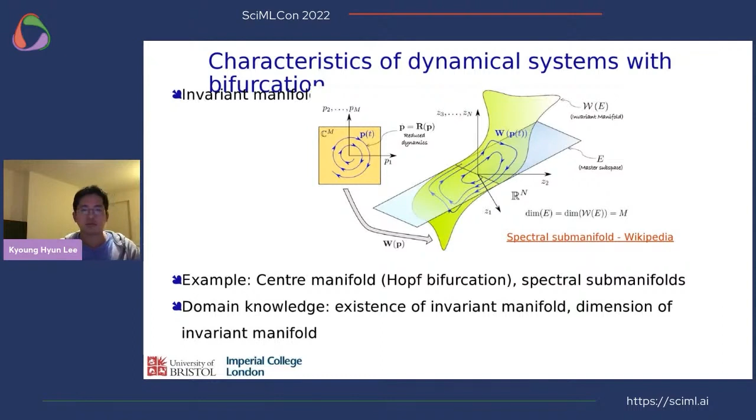This is a general framework for training parameter-dependent ODE models using machine learning. First, we model the parameter-dependent vector field using scientific models, universal approximators like neural networks, or hybrid models. We also need to model the observations, for example as a simple projection map or also with universal approximators.

After we build a model structure, we transform the parameter identification problem into an optimization problem using data fitting criteria such as mean square error. I'll explain in the next slide how we infuse the domain knowledge of the invariant manifold and the bifurcation into our machine learning problems.

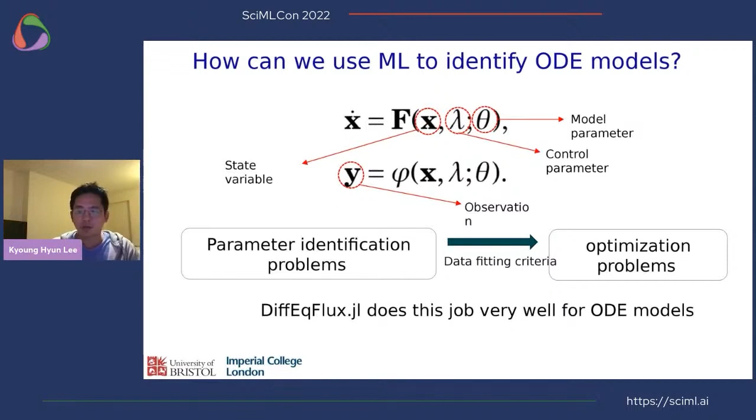Yes. So basically, I do experiments for systems with bifurcations, which is called experimental bifurcation analysis. This is the bifurcation diagram measured from a flutter rig experiment, which is a typical subcritical Hopf bifurcation measurement. These red circles are the measured unstable periodic solutions, which are stabilized using feedback controllers. And these blue circles are the measured stable limit cycle oscillations.

So if we draw this bifurcation diagram, then we can plot this like this typical subcritical Hopf bifurcation diagram. And this, we know the bifurcation structure of this measured system, which is a reduced dynamic on the invariant manifold. And the interesting thing of nonlinear dynamical systems is we can use coordinate transformations to transform this dynamical system to a topologically equivalent dynamical system.

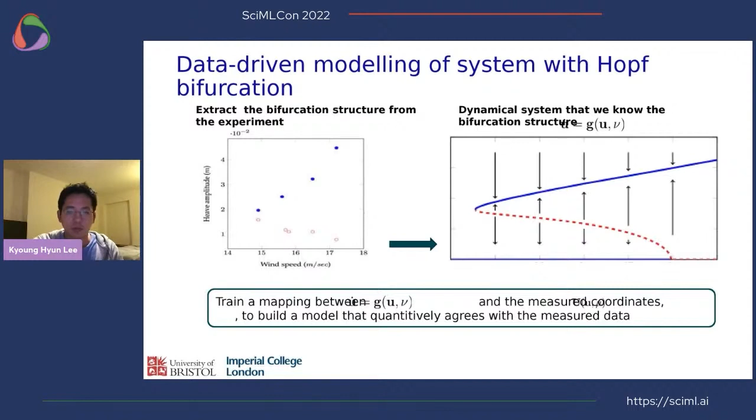So I'm sorry about these equation errors. I don't know what happened, but anyway, I'll just go on.

The equation I have used to reproduce the dynamics shown in the last slide is the subcritical Hopf normal form, but I added quintic terms to reproduce the saddle-node bifurcations to make stable limit cycle oscillations on the upper branch. So this is the basis model I used to make a topologically equivalent dynamical system.

And the advantage of using normal form-like equations is that the trajectories of the LCOs of this system on the normal form coordinates are just very simple LCOs with a circle trajectory. And if we transform this to polar coordinates, it shows that the amplitudes of the normal forms are just simple fixed points, and we can decouple the speed of the oscillations from the amplitude equations.

And using this basis model, we can design the bifurcation diagram very easily using these model parameters A2 to design the bifurcation diagram, and this mu zero is the Hopf bifurcation point, and this large omega is to model the speed of the oscillation, and I use a neural network in my modeling case.

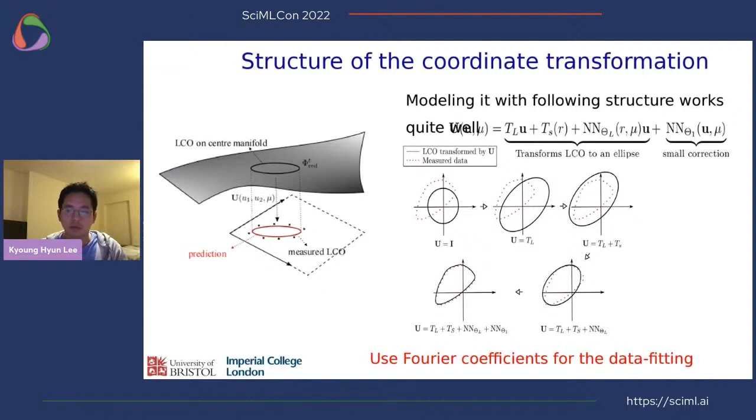And to summarize the procedure of training the model, I first create the topologically equivalent dynamical system on the normal form coordinates, which are just arbitrary coordinates. Then I train the observable between these arbitrary coordinates and the measured coordinates. Then I train the other part of the normal form, which is responsible for the speed of the oscillation, which is this omega function here.

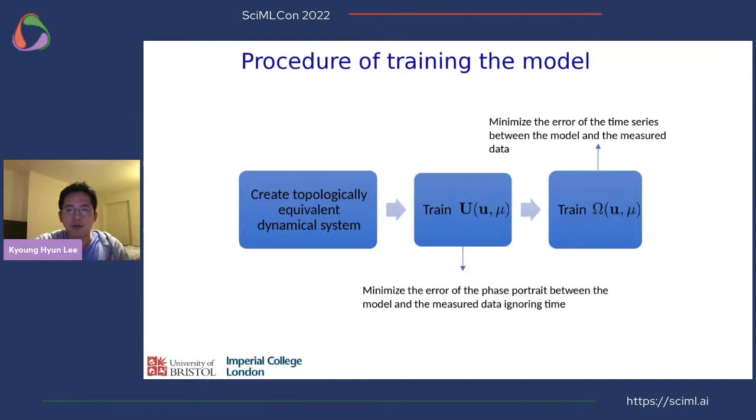And this is the experiment I did in the wind tunnel. This is the flutter rig, and this system oscillates at certain wind speeds, and I measured this flutter phenomenon with this kind of rig and stabilized the unstable periodic solutions using this shaker with feedback control.

So this is the measured bifurcation diagram. These are the measured limit cycle oscillations, stable limit cycles in the upper branch and the unstable limit cycles in this lower branch. And we can see that the bifurcation diagram is quite accurately predicted, and also we can predict the phase trajectory of the limit cycle oscillations.

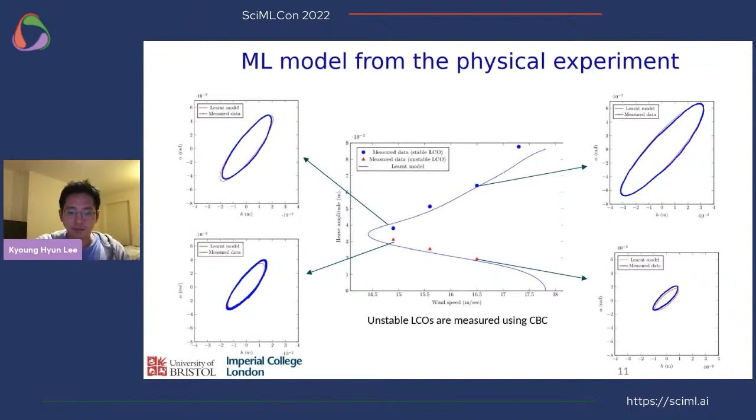And so I also trained the speed of the oscillations using the optimization, in which I used a loss function to minimize the mean square error using DiffEqFlux.jl. So you can see that the speed of the oscillations is very accurately trained on the stable branch as well as the unstable branch.

A little trick to train the unstable branch was that, for the unstable periodic solutions of a Hopf bifurcation, the unstable direction of this periodic solution is in the radial direction, and the radius of the amplitude of the oscillation is a fixed point. So I only did the time integration in the tangential direction, which corresponds to a trivial Floquet multiplier. So I didn't have any problem with stability issues in this case.

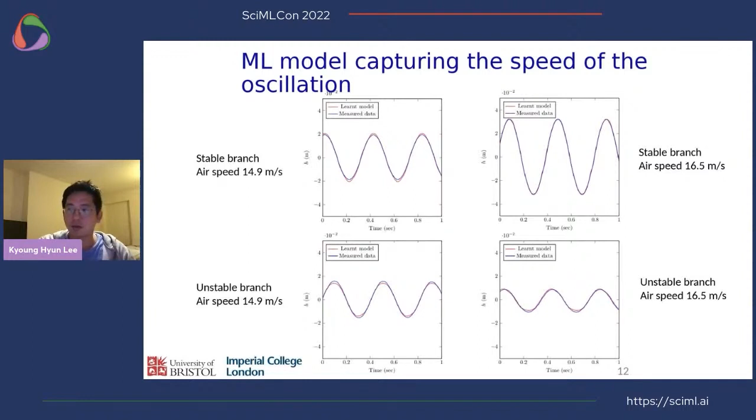I need to go fast, and I'll show you another example of using invariant manifolds and bifurcation theory in training for a mechanical system with harmonic forcing. This type of system also has an invariant manifold, which we can understand as a nonlinear version of modal subspaces.

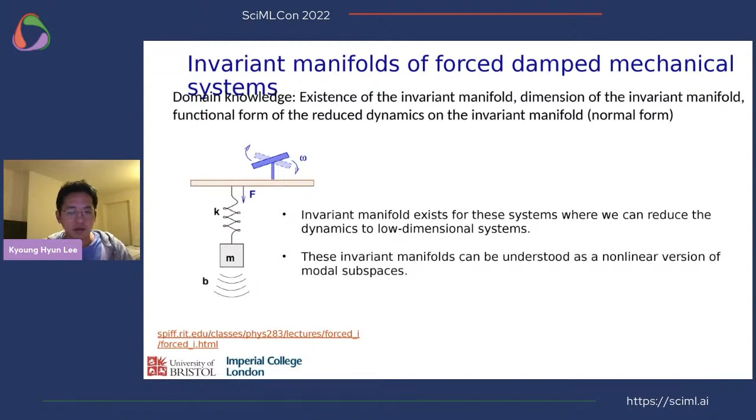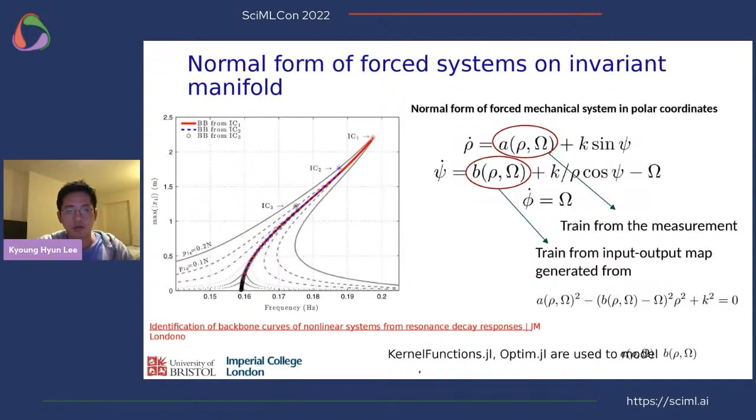And in this case, the steady state responses have very nice input-output map relations. In this case, rather than using numerical integration in training the machine learned model, I used kernel ridge regression, with KernelFunctions.jl and Optim.jl to optimize the hyperparameters. So from the bifurcation diagram, I have trained this machine learned model to predict the steady state response of the system with the invariant manifold.

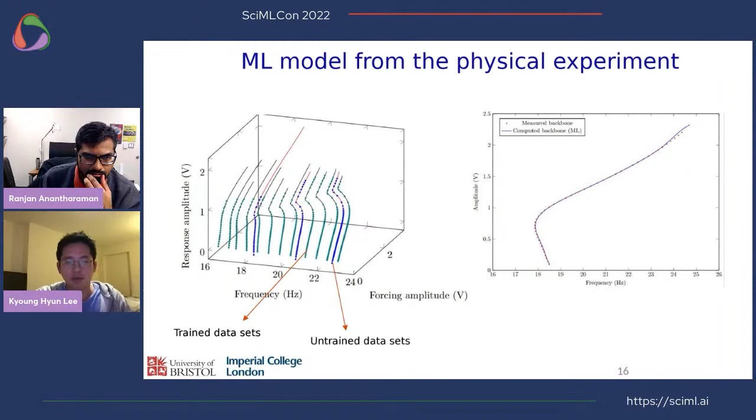I used Julia SciML packages to build parameter-dependent ODE models from data, and the machine learning modeling approach developed here uses the invariant manifold and bifurcation structure as domain knowledge. For future work, I'm trying to identify invariant manifolds from delay embedding maps. Here, I only discovered the tangential dynamics of the invariant manifold, but I want to discover the transverse dynamics of the invariant manifold, with which I can build a much more general dynamical system model. All right.